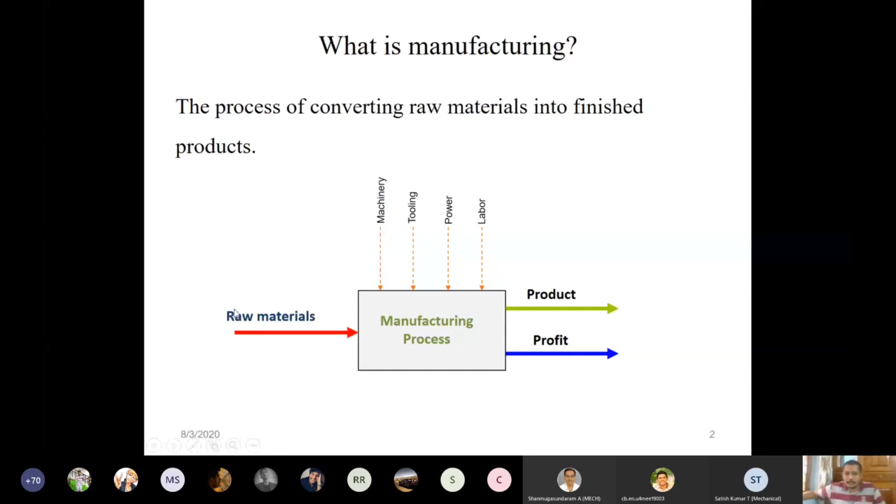I'll run a small video so you can understand the neat classification and its method. So you have come across a small video showing the classification of manufacturing processes as: casting process, metal forming process, welding process, material removal process, then powder metallurgy products, and additive manufacturing also.

In the casting process, as shown in the first figure, you have seen its description also: the molten metal is poured into a mold and allowed to solidify. Once solidified, you break the mold to get your product out, and that product is called the casted product. We have seen only the major classification titled there; under casting, there are plenty of other processes also available.

If you want a product to be suitable for mass production, sometimes the casted product requires additional features like a definite finish, definite limits, and tolerances. In that case, which process can be chosen among the casting processes? That is what we will be going into detail in the first module.

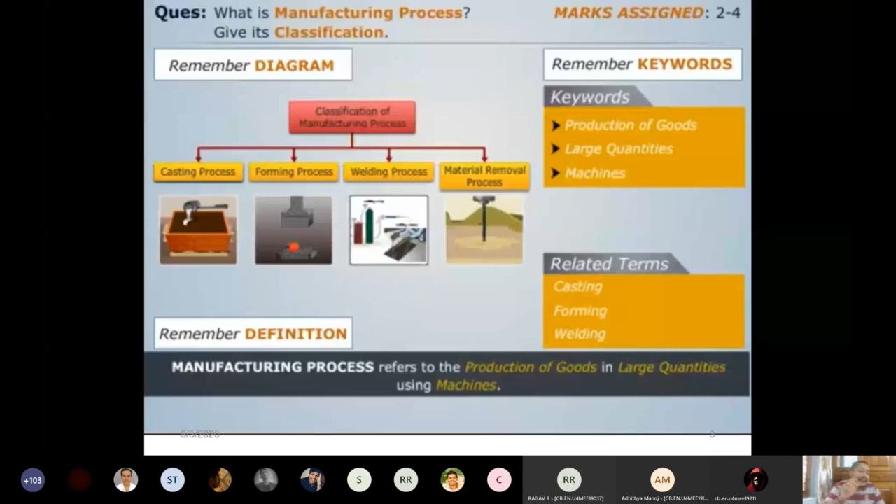Accordingly, under the casting process, you have plenty of operations like sand casting, investment casting, die casting, and centrifugal casting. Each type of product can be manufactured best suited by using a typical process. Your job in a manufacturing industry is to identify which process will be best suited to make a particular product. Once you identify that, you have to determine the process sequence which has to be followed in that particular manufacturing process.

So I'll just give you a glimpse of the things you have to think about when you want to make a product, a manufactured good. The basic manufacturing process, as I told you, is metal casting. You can see a figure with a ladle; the one from which the molten metal is pouring is called a ladle. From the ladle, molten metal is poured into a mold.

Once the casting is done, you will not get the finish shown like this. So you have to go for secondary manufacturing operations like machining. If you want a particular finish or a particular tolerance for your part, you have to go for a secondary manufacturing process like machining. So casting is a fundamental process. The casted product is converted into the final product with the help of operations like machining.

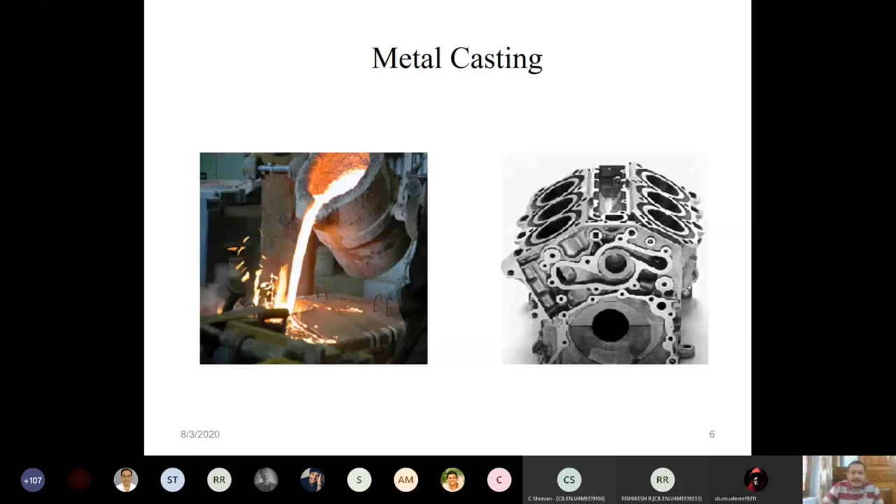So basically metal casting is the first and primary manufacturing process used in industry for making any kind of product or raw materials for other processes. You can see, using the ladle, a worker is filling the molten metal into the mold. These are the molds which are prepared, and on the other side the metal is already poured and it is locked, and the molds are continuously kept like this and metal is continuously melted and poured into these molds.

So metal casting is the primary manufacturing process in which molten metal is poured into a suitably shaped mold and allowed to solidify. Then you remove all these boxes. Inside it will be sand. You break all this sand and get the final product out. Such a process is called the metal casting process.

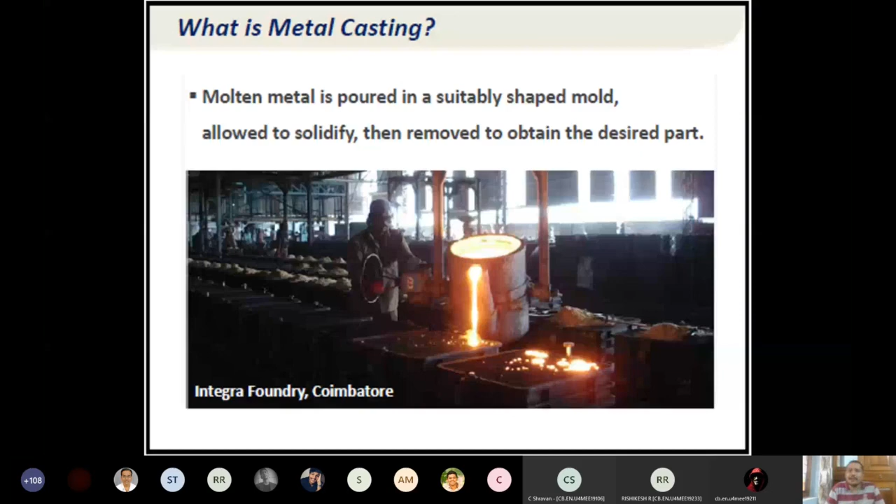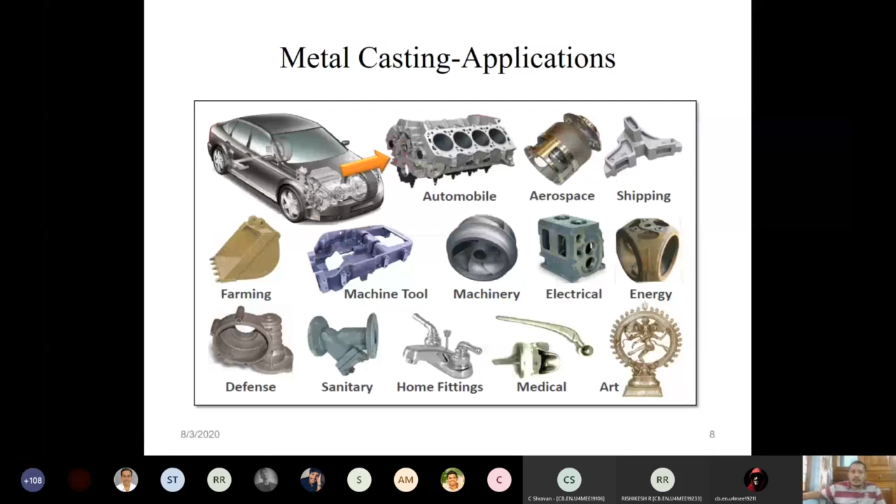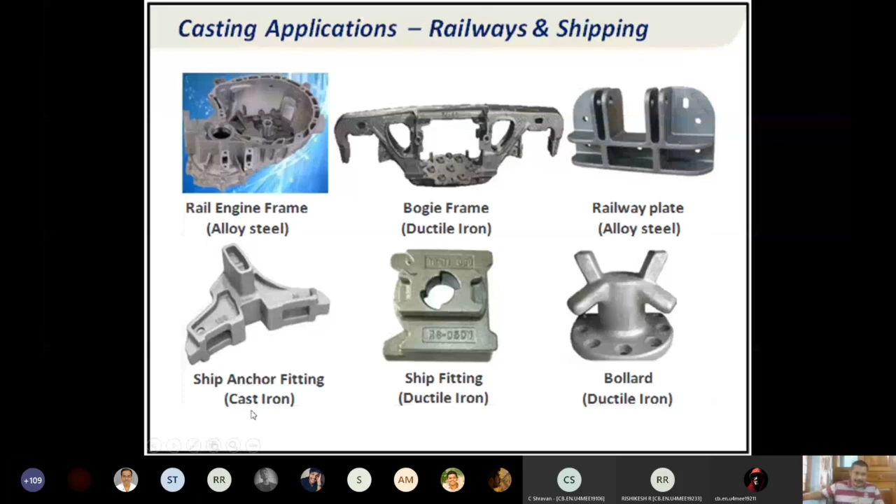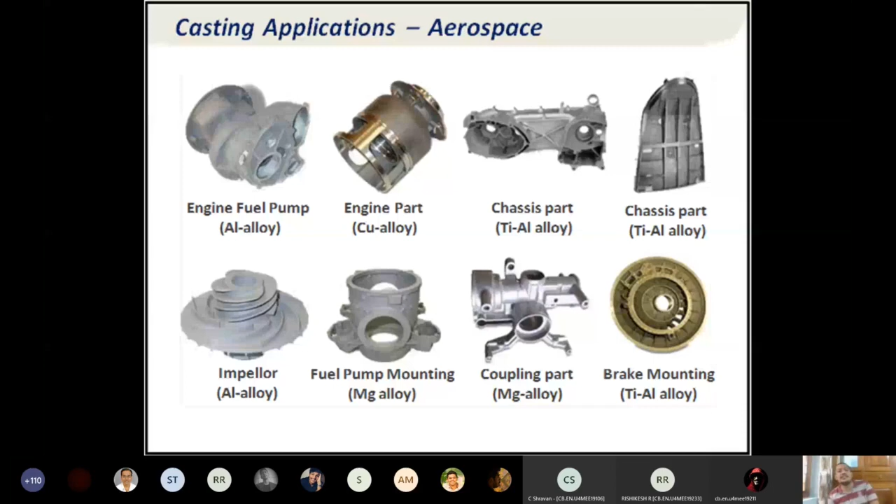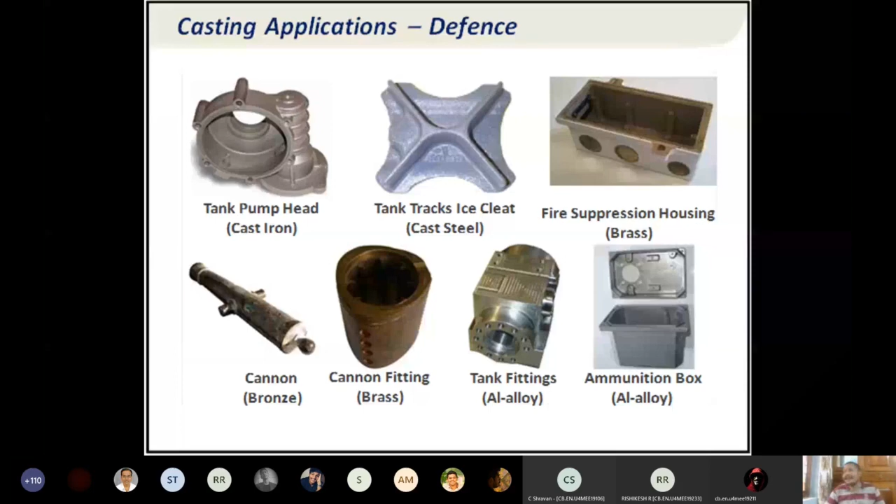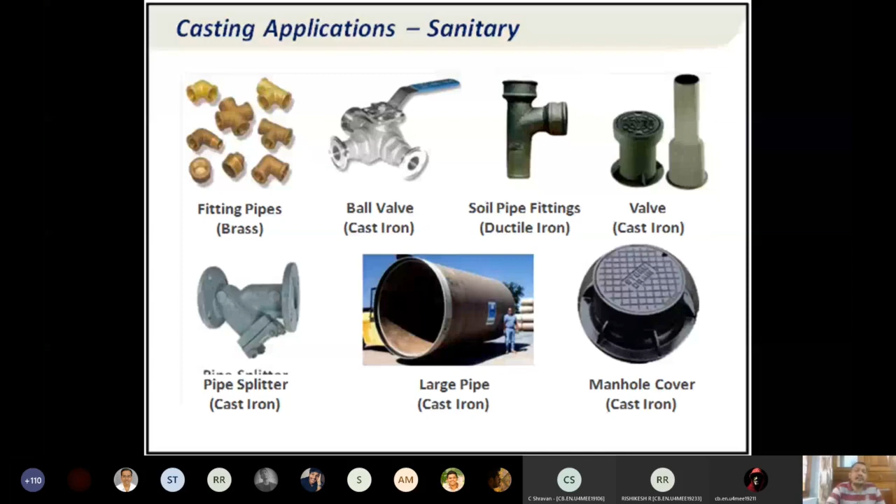So everywhere, all kinds of valves, all kinds of these pipe fittings, brass pipe fittings, pipe splitters, large cast iron pipes, manhole covers, these all are made by using the casting process. Not only there, in machine tools also, compressor cases, hand wheels, spanners, shaft housing, coupling parts, frame housing, all these things are made by using the casting process.

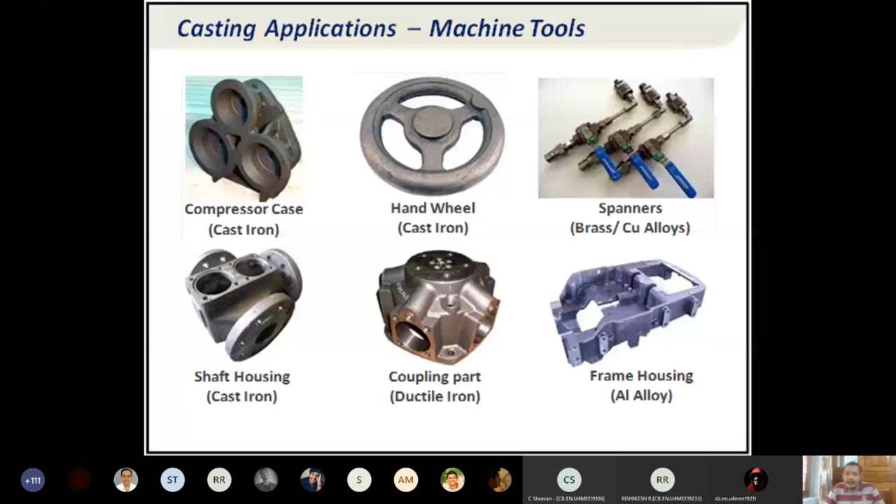Now coming to the electrical side, you can see the motor casing, generator housing, switch gear housing, your compressor case, pedestal of wind turbine, windmill hub. These all things are also made by using the casting process. Even the windmill blades and windmill turbine parts, they all are made by casting.

Now size wise, think about the windmill blade. If you come to the lathe shop, shed number 4, you can see the lathe where the entire lathe bed is a casted product. So likewise, very large components lengthwise and smaller components can also be cast easily by using this casting process. So size, shape, dimensions, these are not at all a restriction in the case of the casting process.

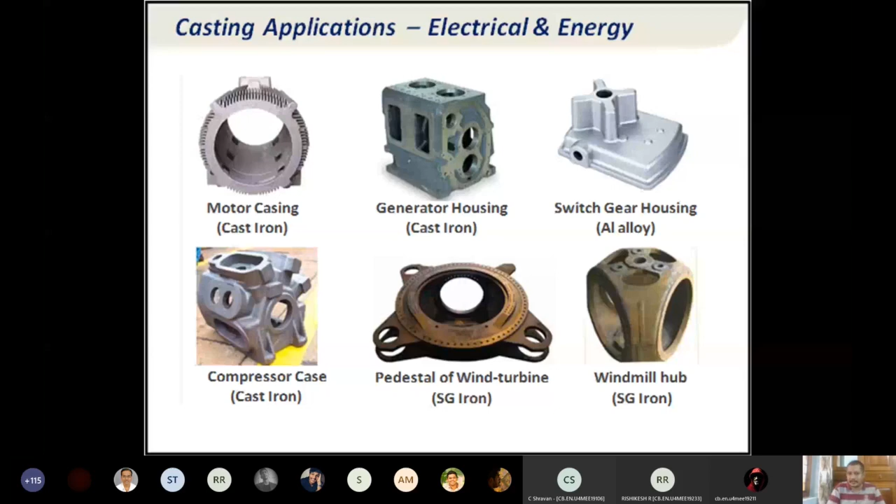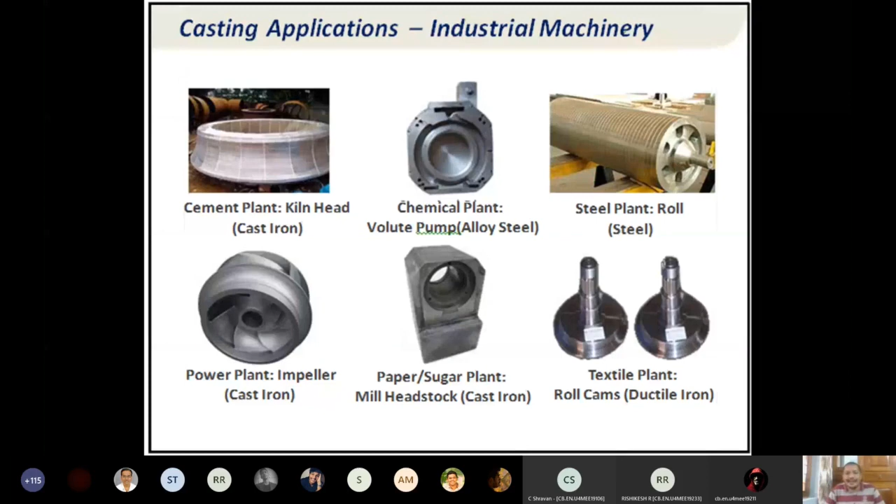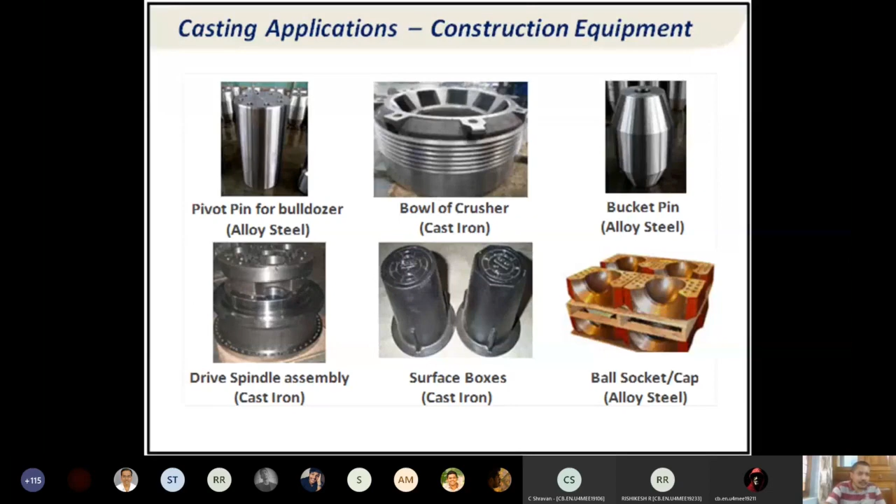So you can see some of the industrial machinery parts, impellers for power plants, paper or sugar plants, mill headstocks. So basically all the parts are manufactured as casted products. According to your need, you will use other processes to convert or shape that into the products. So construction equipment, farming and mining equipment.

These are biomedical implants, your teeth implants, knee implants, hip implants, shoulder, oral implants. All these biomedical implants are also casted products. And you can see the alloys are titanium alloy, titanium cobalt alloy. Here also it is titanium cobalt alloy. So from lower melting point metals to higher melting point alloys, they can be made by using a suitable casting process.

Not all the processes are suitable for all the metals. You have to take that into account. Likewise, size wise, not all the casting processes are suitable in that case also. So you have to select the proper manufacturing process for the required finish and conditions. If we see the tooth implants, their dimensional tolerance, dimensional finishing, etc., you have to take extreme care.

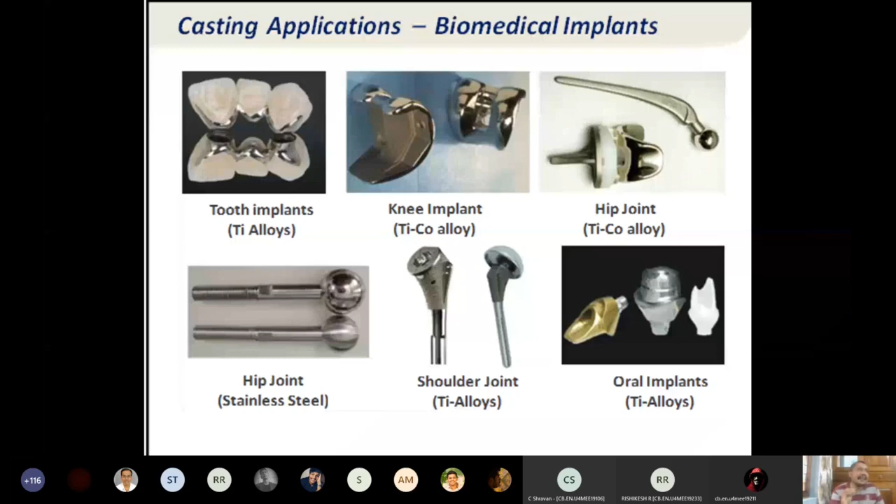Whereas if you have seen a hand wheel in the previous slides, only the outer area is what you are going to touch with your hand. So that area alone needs to be smooth. Whereas in the case of teeth, that is not the condition. So accordingly, whatever your limit, fit, size, dimensions, etc., you have to select the proper casting process.

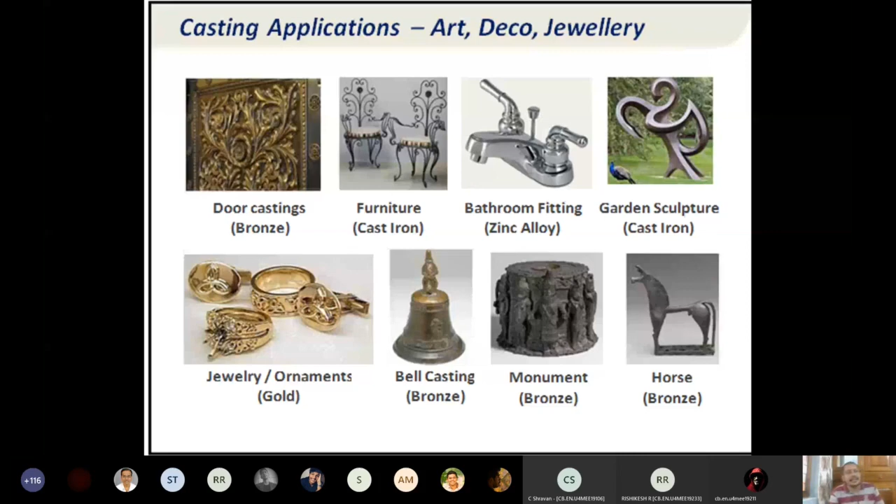So you can see the art deco or jewels. They are also made from casting. Even jewelry ornaments, gold ornaments are also made by using the casting process. So across all the sections, you can see the applications of metal casting.

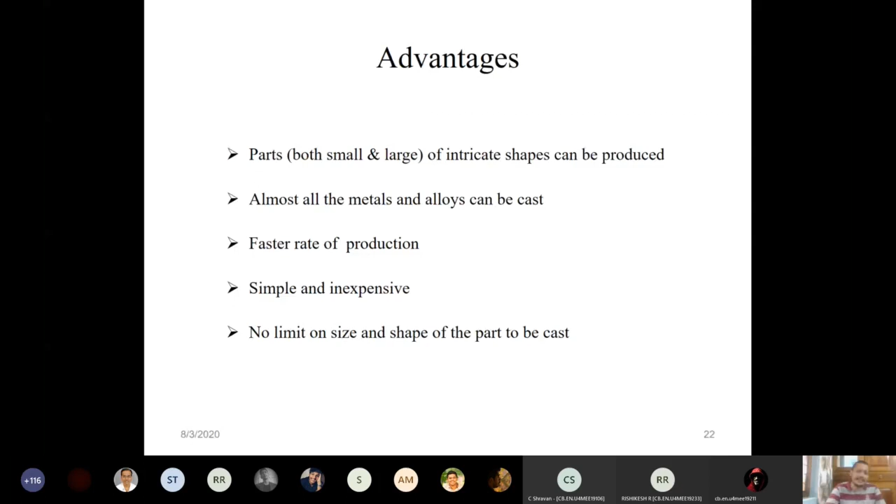So the advantages of metal casting in general: parts both small and large of intricate shape can be produced. Almost all metals and alloys can be cast. Faster rate of production, simple and inexpensive. No limit on size and shape of the part to be cast. These are the advantages of the casting process.

Disadvantages: limitations on mechanical properties, poor dimensional accuracy and surface finish for some processes, especially sand casting. Safety hazards to workers due to hot molten metal. That is, if you have not prepared your mold perfectly, sometimes the mold may crack. When the mold cracks, whatever molten metal you have poured into it will spill onto the ground within a fraction of time. So worker safety you have to ensure.

And when you are melting certain metals, it will generate toxic elements. So those toxic elements also you have to take into account. Then in certain cases when you are melting, obviously you have to fire it, so NOx emissions or CO2 emissions will be there. So it will create environmental problems. And improper mold design: if you are not designing it properly, casting defects may also occur.

And if you want to make only one or two products, that is small quantities, in that case making a mold, making a pattern, all these things are not justifiable. So these are the disadvantages of the casting process.

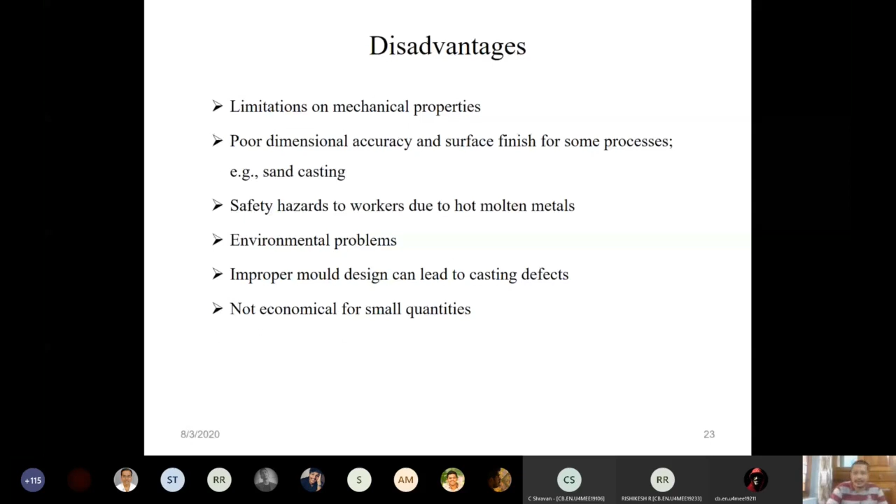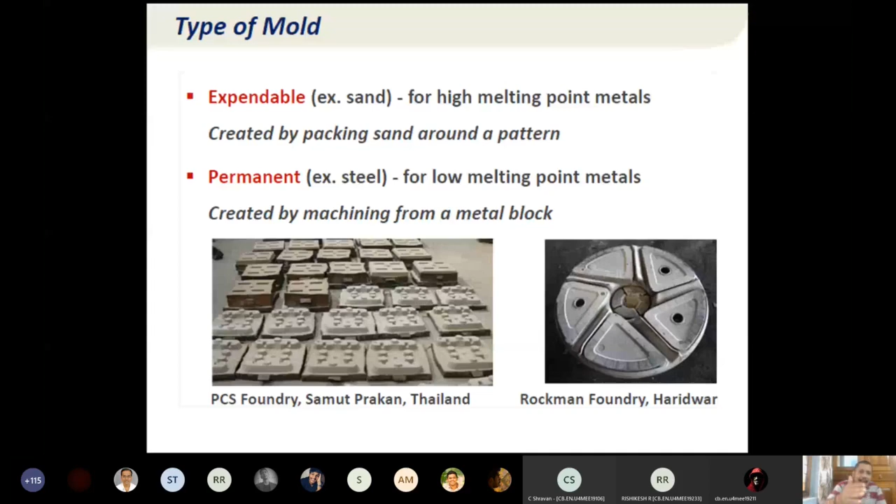So if we talk about the classification of this molding process, you can see that there are two types of molding processes available. One is called expendable mold and the next is called permanent mold. I'm not going into its details right now; we will see its details in the next classes. And these are again based on the filling condition. So you will have mold filling under gravity, pressure, low or high, or vacuum.

So these are all the ways, and you can see the pressure die casting plant at Hyundai shown over there. You can see the neatness of the floor. If you go to a sand casting plant, you cannot find this kind of neatness over there. So it depends on what the process is, what the part is, what product you are making. Accordingly, all these conditions will vary.

And somebody told me initially that in casting we will not use pressure. So you can see the mold is filled under gravity. It can be filled under pressure, and pressure can be low or high, or it can be filled under vacuum condition also. Okay, so these are about the filling condition.

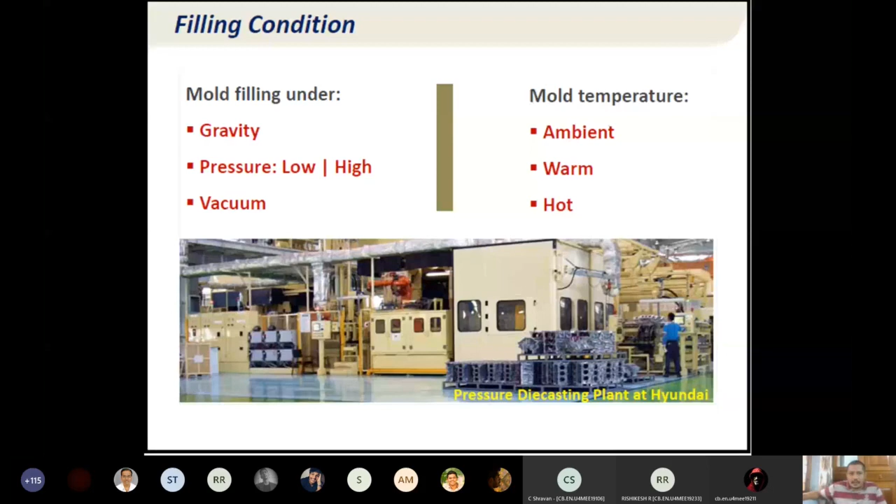And now we will see the general steps for any casting process. What are the general steps in casting? So if you want to cast any product, first you need to melt the material. Then you have to make a mold cavity. The mold cavity is nothing but the replica of the product you want to manufacture. Now into this mold cavity you have to pour the molten metal. Once you pour the molten metal into it, the mold cavity will be filled.

Then you have to allow some time for the molten metal to get solidified in this mold cavity. Once it is solidified, you can break the mold and take it out. Once you take it out, you have to clean the product, and further treatments, either machining or heat treatments, can be provided on the casted product. So these are the general steps followed in a casting industry to manufacture any product.

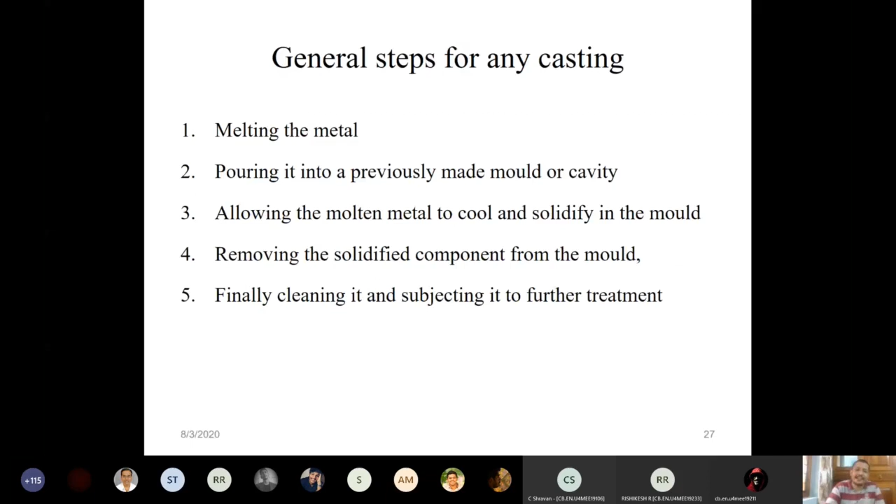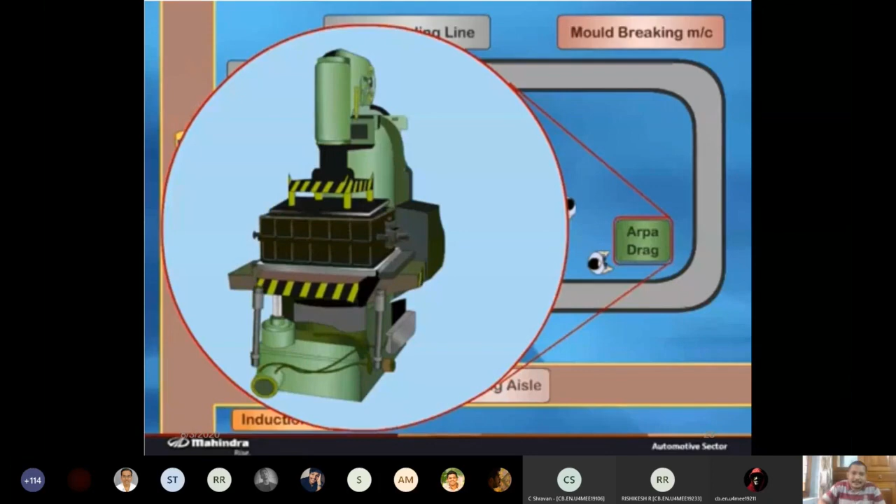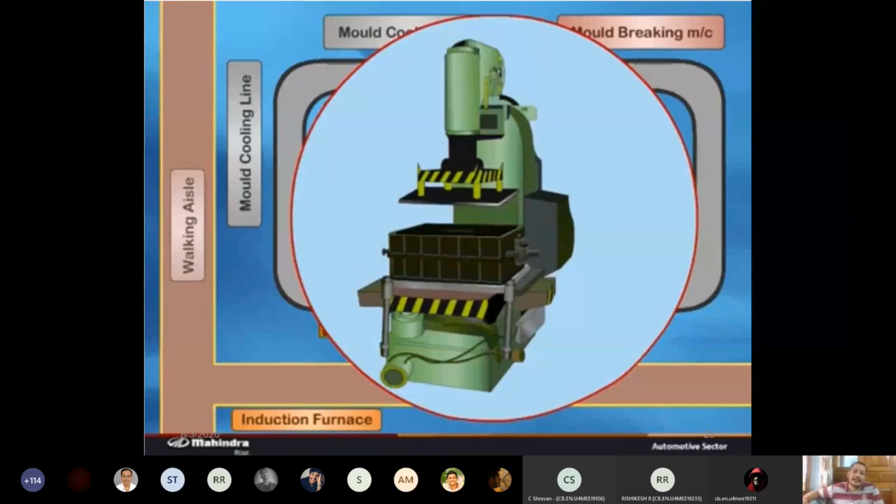So this is a typical industry layout. Inside the casting, you can see the various processes happening inside a foundry in a schematic layout. So you can see that this is the place where molding is performed. There are 2 boxes where the molding is being performed. One set of mold made over there is named the drag. Another box is being prepared; it will be named the cope.

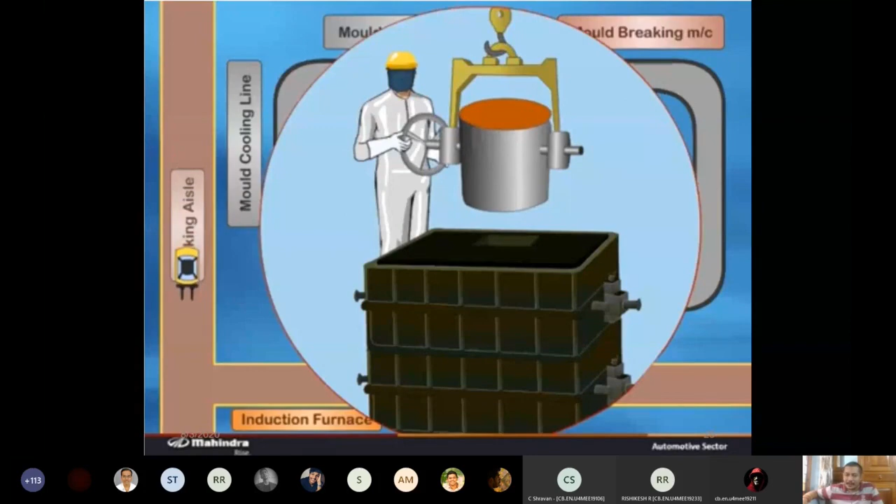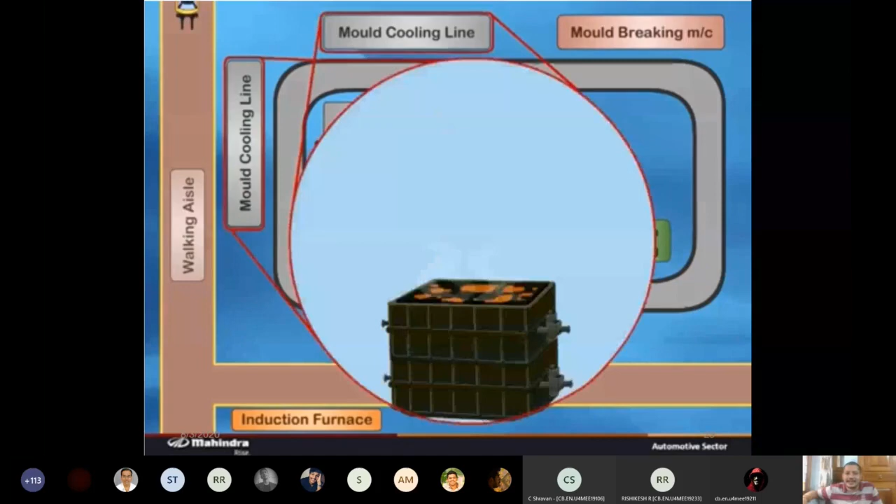So in casting, you have to prepare 2 box molds called cope and drag. The cope and drag are kept as one unit and go into the metal pouring unit. In the metal pouring unit, the person will tilt the ladle and the molten metal is poured into the mold. When it is pouring, you can see it will be spilled across the areas also. Once the metal is poured, it is kept in the area for cooling. You can see the molds are stacked one over the other as shown in the figure.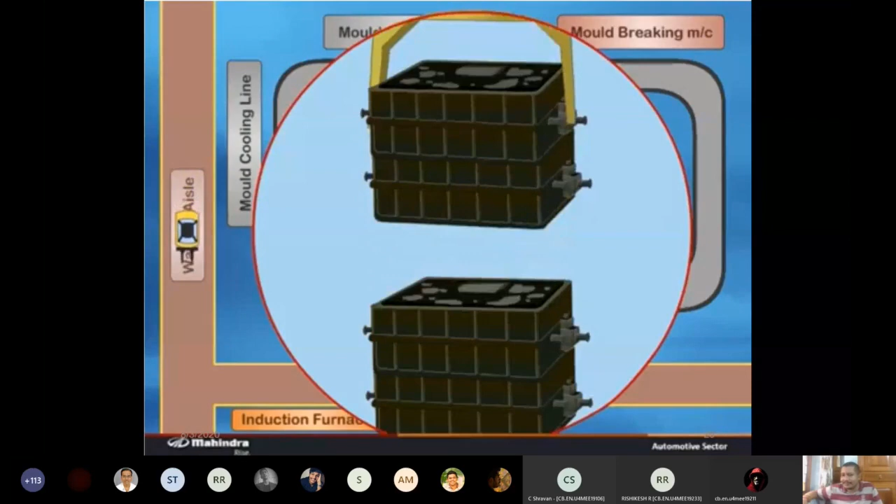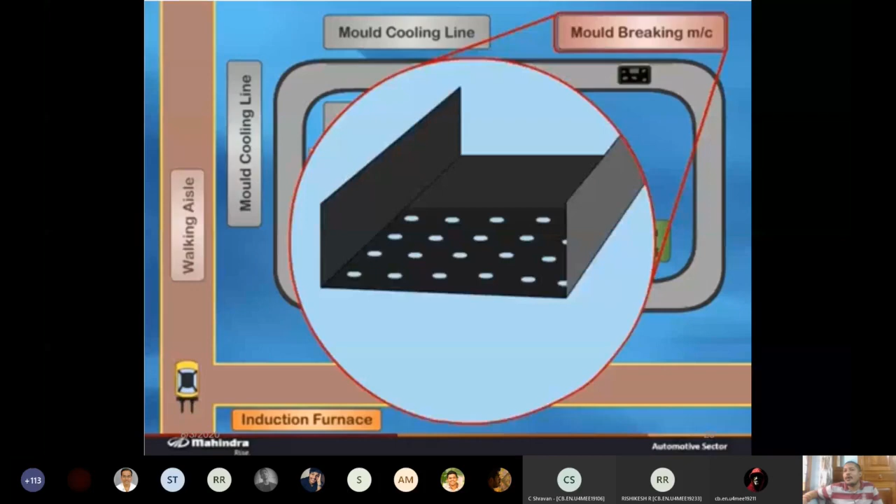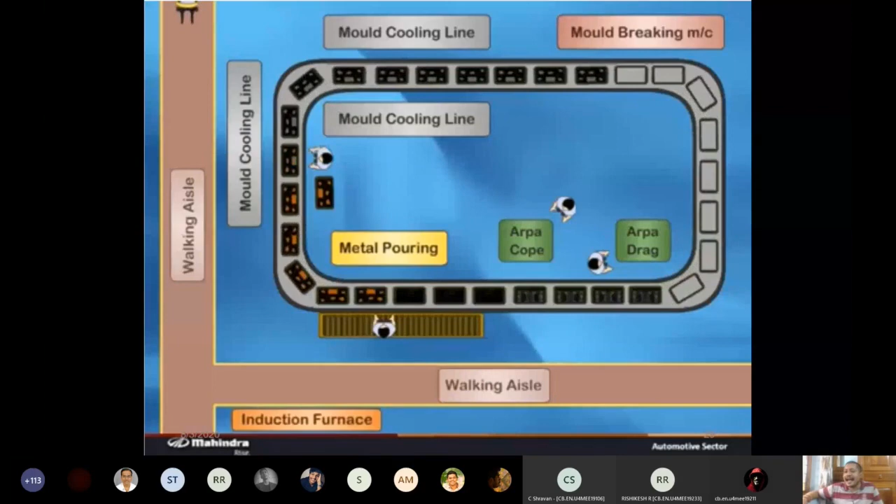Once the proper solidification time has been reached, the mold is sent into the mold breaking machine. You can see it is a vibrator. On this vibrator, the sand particles are separated from your casted products. The sand will be sent back into the drag or cope area, and it will be recycled and reused. The product will go from there to the inspection line.

This sand you have seen here is a typical combination of different sands. So how to prepare the sand, how to prepare the mold, what are the parts of a mold, and what are the types of sand, all these things we will see in detail in the next class.